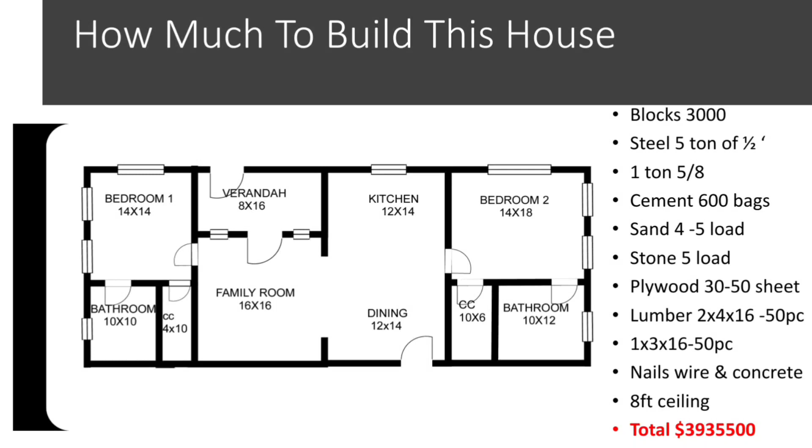Some people prefer to use their 3/8 steel. So again, whichever way you go, that's up to you. And you'll be needing your binding wire. So that's the majority of the material you would need to get your home out of the ground. Once you're finished digging out your foundation, to get your house started and blocked up and decked, those are the materials you will need to get that going.

So now let's talk about labor costs, because for labor costs, I always just double whatever I spend on material. That is just my way of budgeting. So if I normally spend $3,000 on material, I always just budget $3,000 for labor. Again, it's not always going to be the case. Most of the time it will be lower, but that's my way of making sure I'm never short.

So we're going to cover some of the costs that you're going to have to face, such as your foundation, your columns, your lintel, the cost to set up the decking, the price to cast the decking, to put up your blocks, your stirrup costs, and your steel costs. So those are some of the costs you're going to encounter for this first stage, the shell of the house, as you go along.

Okay, so for the line out of the foundation, it's going to cost you $49,320. For the digging and cast, it's going to cost you $219,200. The columns will cost you $121,600. The lintels will cost you $50,400. The belting will cost you $219,200.

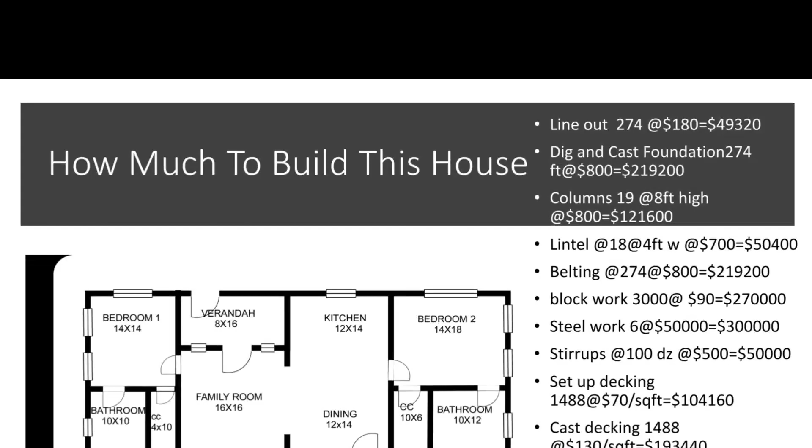Okay, so at the end of the day, for just getting the house up out of foundation and what we have discussed so far, for a 1,488 square foot home, it will run you $5,512,820 Jamaican dollars just to bring it to that.

That price does not include any inside finishing. You also have to take into consideration that you do have to put in your electrical, your plumbing, and all your fixtures such as your cabinets, your countertops, your closets, and all the little accessories like your windows, the grills, your doors. All those are under finishings, and those haven't been considered into this price.

A lot of you were asking for labor costs, and that's the breakdown for the labor cost to bring it to that shell. The reason why I did not give the rendering price in here is because a lot of people now are using drywall. So again, the choice between drywall or rendering comes back down to individuals. Those are some of the figures that you're going to have to work out on your own, but this is the cost that it's going to run you guys.